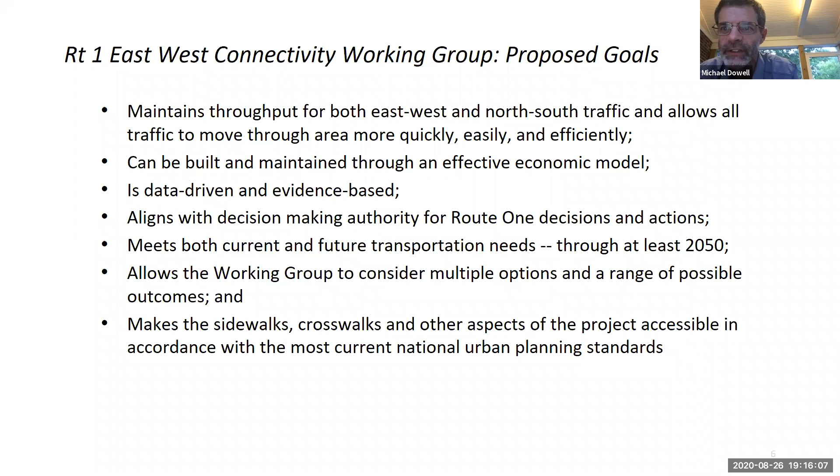Okay, so that's the overview of the proposed goals. Keep those in mind tonight as you listen to the presentations, and I look forward to getting a lot of input back from everyone. Okay, thank you.

Yeah, and this is Dana Bress. One of the things we need to do is find out how the community uses and crosses Route 1. We all have our horror stories about problems we've seen with it.

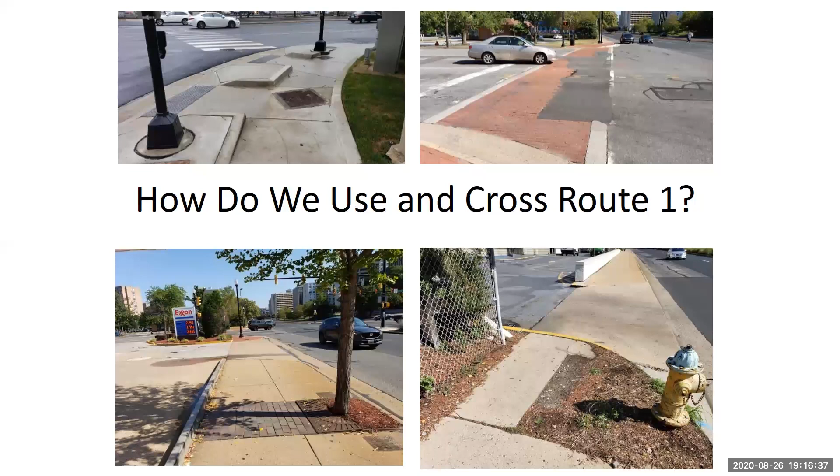So what we've done is crafted a small survey that will holistically look at the full length of Route 1 in Arlington County. We're not starting at 23rd Street, we're starting basically at 4 Mile Run. Because most of us both cross Route 1 as much as we use it as a thoroughfare, we want to help understand your priorities and your issues.

So we have a Google Form survey that's up, and we will email the link to y'all and provide it to the civic associations for their members as well.

Basically what we're trying to find out is where do you live and work, where do you cross Route 1, and where do you avoid? We all have our favorite crossings - I fancy 18th Street - and then we have the ones we avoid like the plague. Both of those are important, because the ones that everybody avoids probably are the ones that the planners need to look at harder.

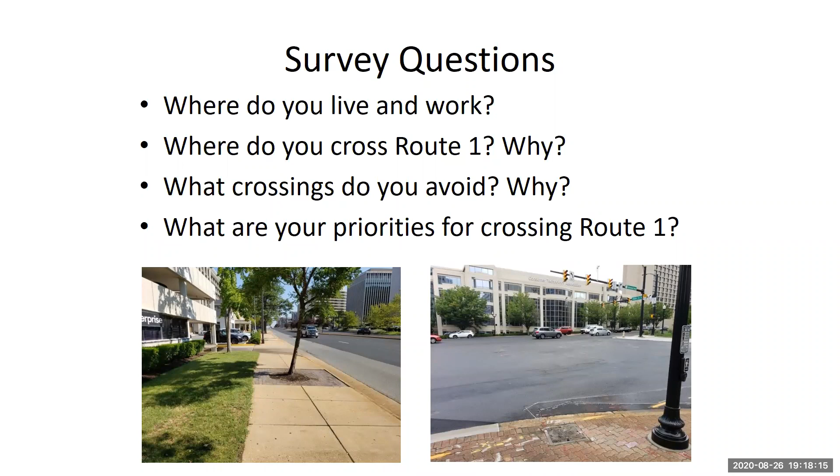And then what are your priorities? Do you cycle across Route 1? Do you walk? Do you drive? This survey is going to be up for a couple of weeks, and we encourage everybody to participate so we can maximize the input from the community members. Thank you.

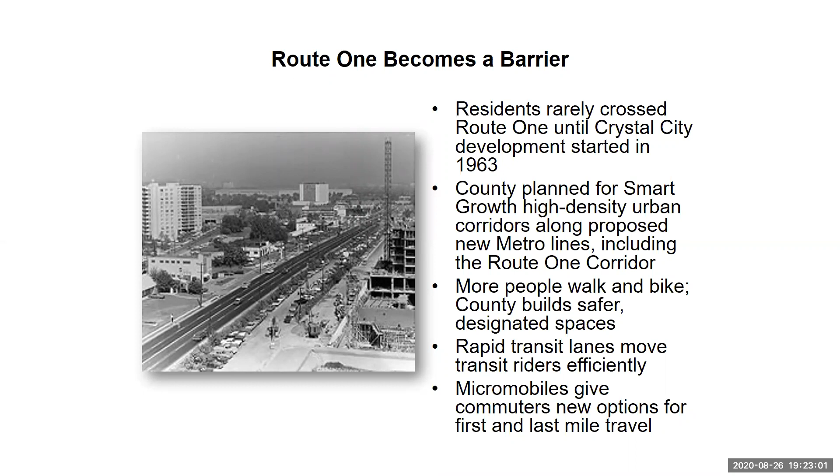Since then, alternative transportation modes have kept increasing. Walking and biking are increasingly popular and better supported by safer designated spaces, including some of the bike lanes you all use. Rapid transit lanes such as Metroway ensure buses can move efficiently so riders can reach their destinations basically as fast as driving. And then a variety of other mini modes of transportation, like the scooters you see everywhere, provide new options for first and last mile travel.

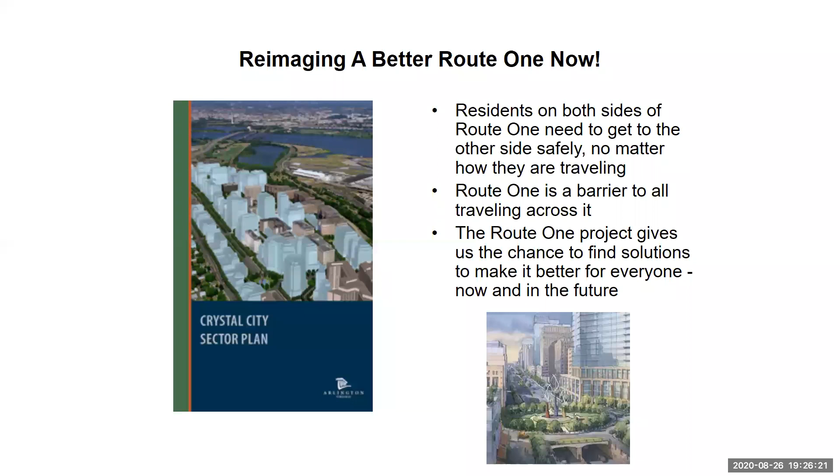So the project that we're working on right now is to redefine Route 1 so that it's not a barrier and isn't often a safety hazard to all people traveling across it, whether walking, biking, or driving. I think this project will give us the chance to make it better for everyone, even now and going into the future. So that's the conclusion of my quick history, and we'll take it away from there.

Thank you, Emily. We'll turn it over now to Darren Buck for the working group ideas.

Hi, everybody, I'm Darren Buck. I'm a 10-year resident of Aurora Highlands and a few years in Arlington Ridge before that, a few years working in Crystal City before that. I'm a professional transportation planner, but my qualifier is I am definitely not here representing my current employer. I'm here as a resident who is really interested in this project and eager to see what comes out of it.

So I wanted to talk a little bit about some ideas, and I'll take my video off, and let you know that unlike last time, I do not have a pizza on the way, so I should be able to talk uninterrupted. We want to talk about some ideas of what we could do with Route 1. I'll qualify them up front and at the end to say these are really just ideas. In discussions, we tried to weed out things we knew weren't going to happen, but these really are kind of unconstrained by a lot of reality.

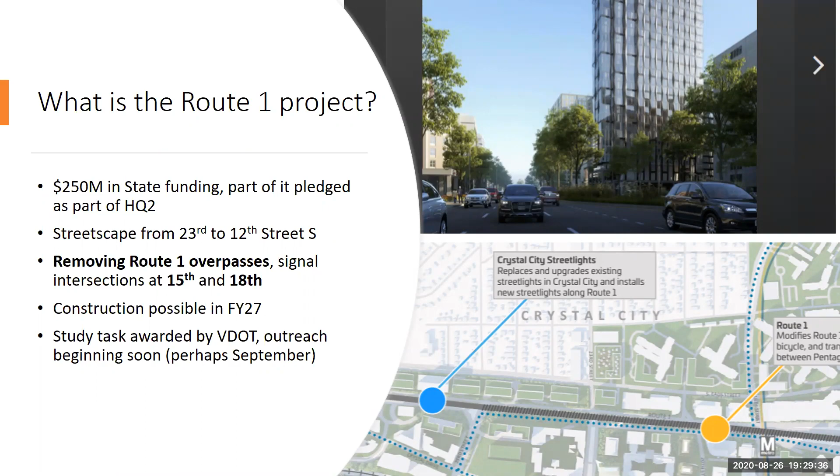Next slide, please. So last time we reviewed some of the potential impacts as we saw them, based on what little we know about the project, of lowering Route 1 to grade at 15th and 18th. I'm not going to go over everything here, but I've bolded what we thought were the major positives and negatives: delay, safety, the aesthetics and personal comfort aspect, transit impacts, and development potential.

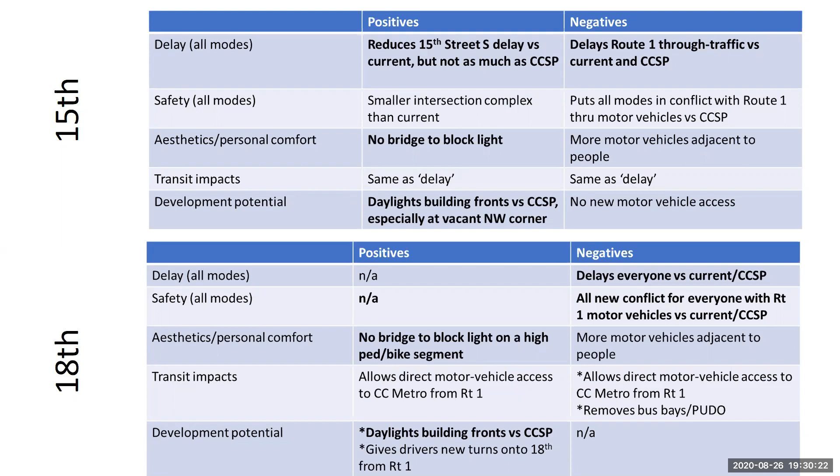Next slide. So last meeting, Mr. Matusek, the county planner for the area, told us that the Route 1 project is going to be wider than just considering the at-grade option, and that's great. So we took that license and we ran with it, and started thinking about what we could do other than just simply dropping to grade.

So we wanted to introduce some new ideas. Again, some of them are a little out there, but let's talk about them. These could form the basis for different plans, either at particular intersections or segments, or for the whole Route 1 corridor. So think of these as concepts that maybe work in one place, don't work in another, or maybe something more suitable for a whole corridor treatment—who knows.

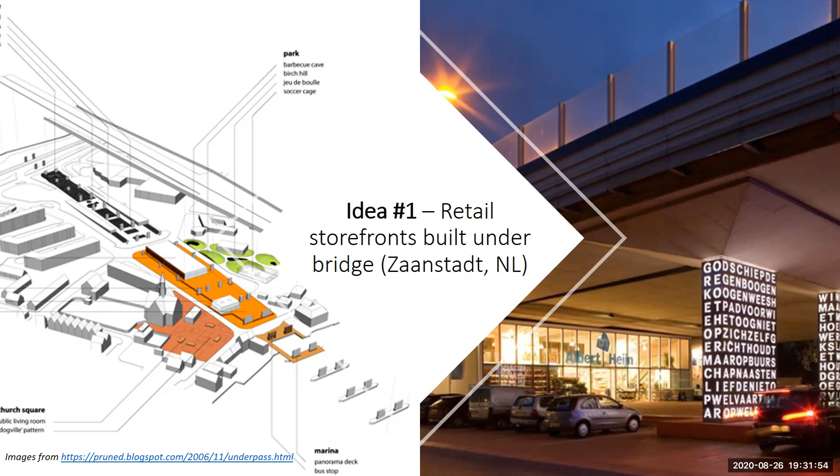Next slide, please. So our second broad idea is creating more open space under an elevated structure. Many places have used the open space under bridge structures that are held up by piers—big vertical columns—instead of just abutments, the big hills of dirt that divide east and west here in our area.

So this space under the Granville Bridge in Vancouver, British Columbia is a great example. It's got buildings fronting onto a street that runs under the structure. It's worth highlighting two things that Granville Bridge has that we don't: a lot of vertical clearance or headroom, and that really nice vintage steel girder structure. It is an attractive bridge.

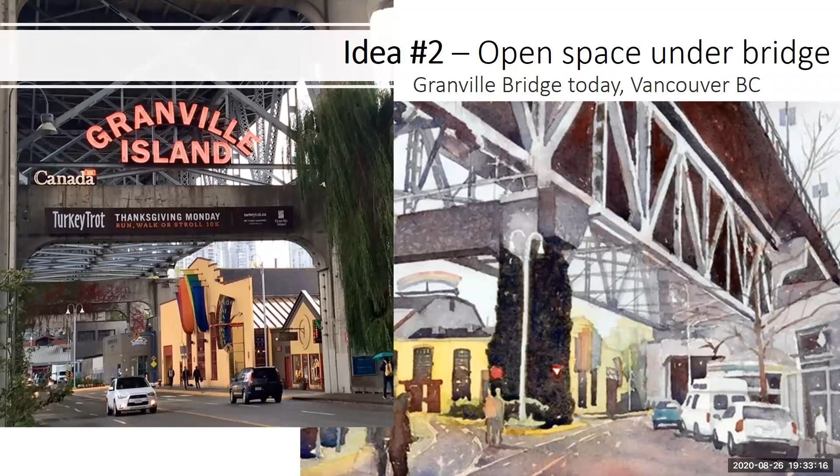Here's a future concept that I believe is under development for another portion of Granville, where development actually fronts onto open space for the community. And we all love our shade and open space—it's shaded from day one.

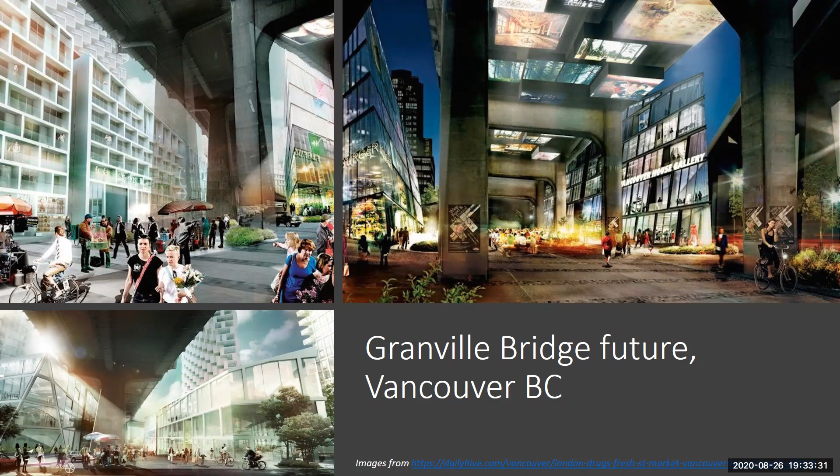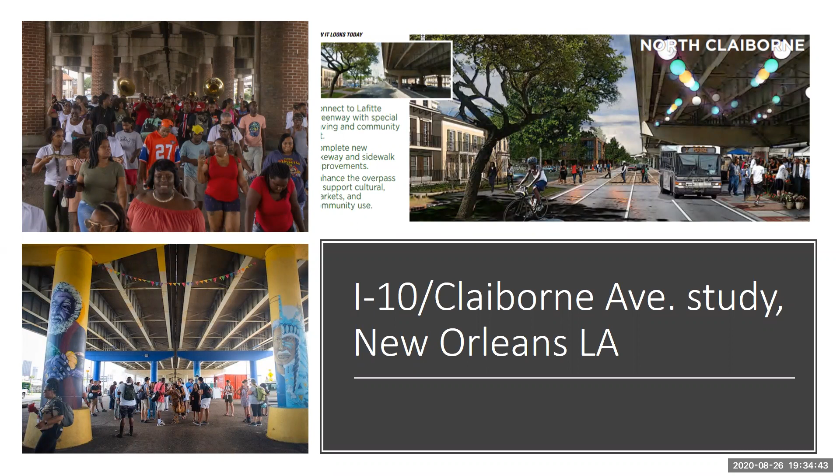Finally, another example of activating open space: this is under a highway, a section of Interstate 10 in New Orleans, where they formally studied whether or not they should take down that viaduct. I believe they ultimately decided to maintain it and make better use of the space underneath. Unlike some of the previous examples, this bridge structure itself isn't particularly attractive, but it's still more open than our underpasses, and it's used.

So third, this is kind of one of my pet ones: can we consider running Route 1 under some cross streets instead of over or through? There's a wildlife crossing structure shown on the upper left, or for those who know India Point Park in Providence, Rhode Island, on the right. This could enhance east-west connectivity for all modes, with the addition of sunlight from removing an overhead structure, but also giving you the chance to introduce biophilia that these cross streets don't have now.

This would be a particularly compelling option at 18th Street South, as I've produced a very crude sketch in the lower left. There are no intersecting car movements now to accommodate with ramps. However, a big potential limitation here, and for some of the options to follow, is the unknown factor of the Metro Tunnel under 18th Street and exactly how deep it runs. I've heard anywhere from 15 to 75 feet, so that's a big question for our friends at VDOT.

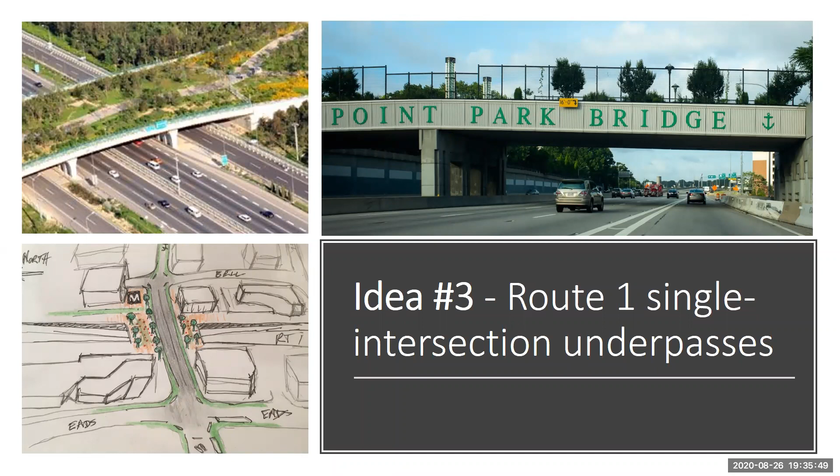So we've got what we're calling option 4A, which would take a substantial length of Route 1 and put it underground with a cap over it, with some combination of open space, development, and a small surface street for local access running over this sunken highway. The previously noted challenge of the 18th Street Metro Tunnel applies here as well.

Boston's Big Dig, shown here, shows something similar, though the surface street is much larger than what our area would require. The Big Dig overall was a far, far larger project than our stretch would be.

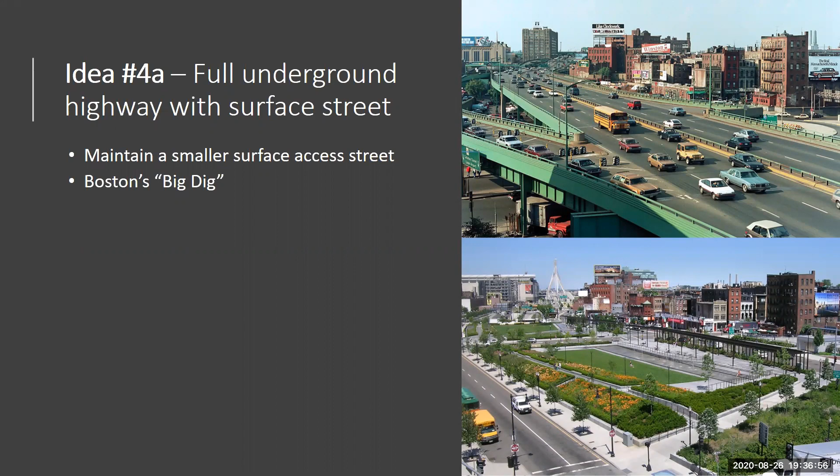Here's another, more scaled option, probably more similar to ours. This is from Denver: there's a concept to deck over a part of I-70 with parkland and surface access roads. What you see on the left is the current situation—an elevated freeway that runs right by an elementary school. So this project is tearing down this highway, putting a wider version of it with toll lanes in a trench, then decking over this 4-block section with a park that's right adjacent to the elementary school.

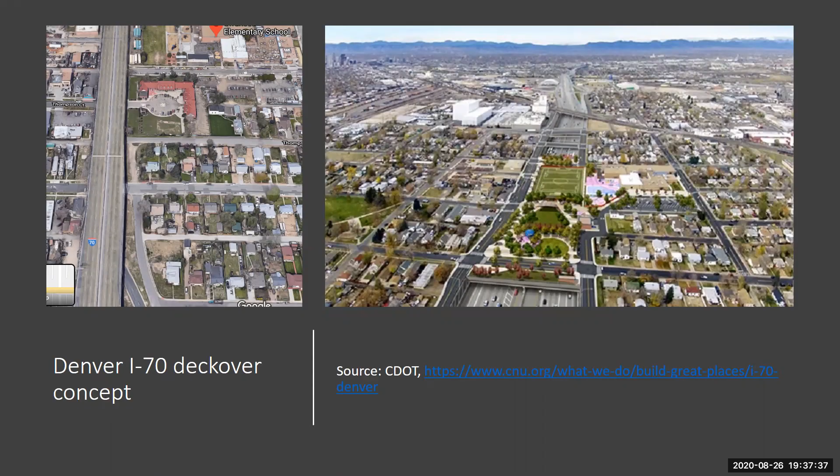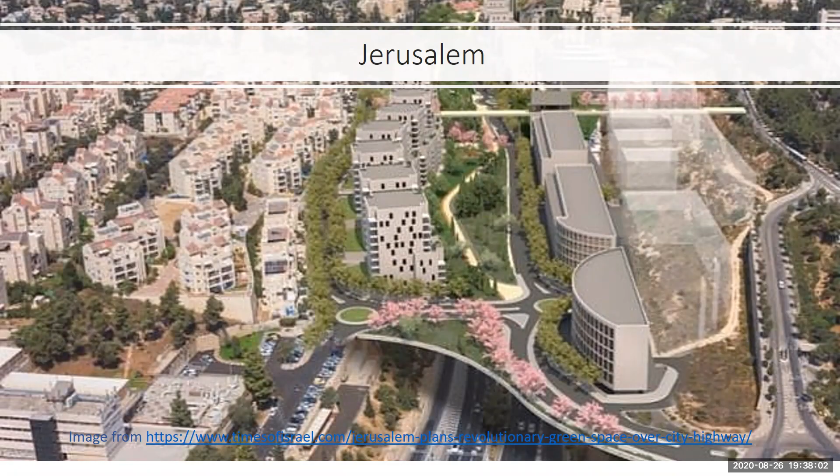Our next idea is a twist on the previous one, going a little further. Can we imagine the entire Route 1 below grade, with some combination of open space and development over top, but with no surface street, relying on Eads, Clark/Bell, and the cross streets for intra-community motor vehicle access? Again, the 18th Street Metro Tunnel is the challenge, with the added twist of how exactly our community would access Route 1 in this scenario.

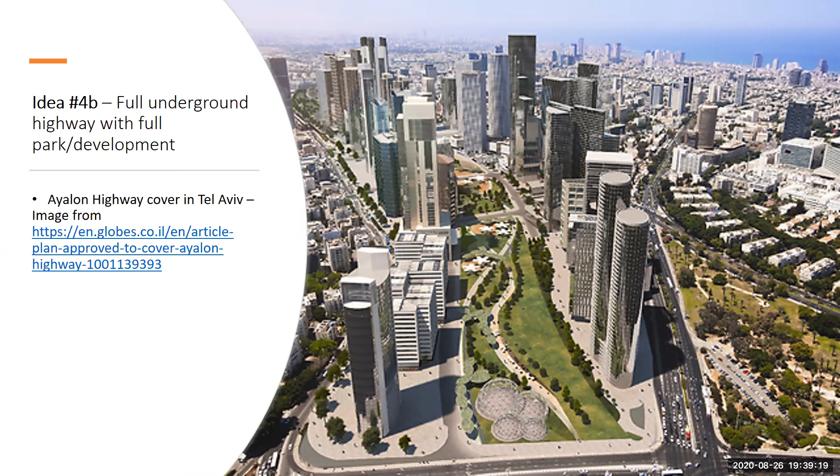This example in Tel Aviv is actually under construction. It's a very substantial highway and transit line running beneath. You can see it's a pretty wide stretch, a pretty impressive project.

Another one from overseas: this is a section of the Autobahn, a 2-mile stretch in Hamburg, Germany. They are putting that highway in a trench and decking over with a combination of parklands and homes.

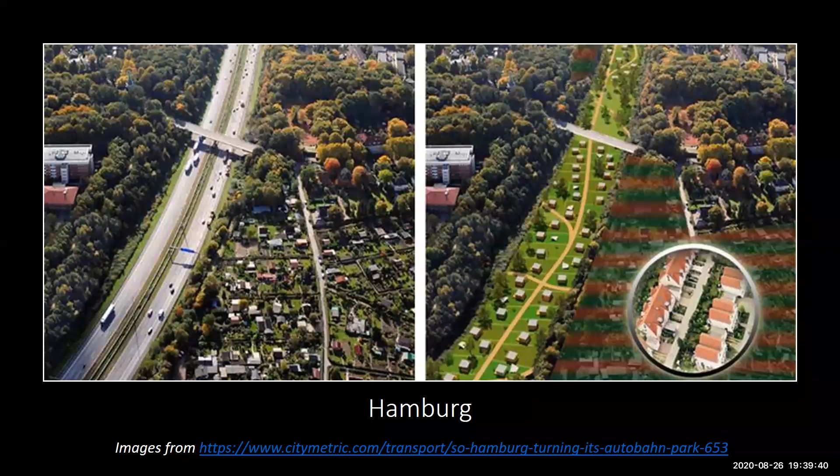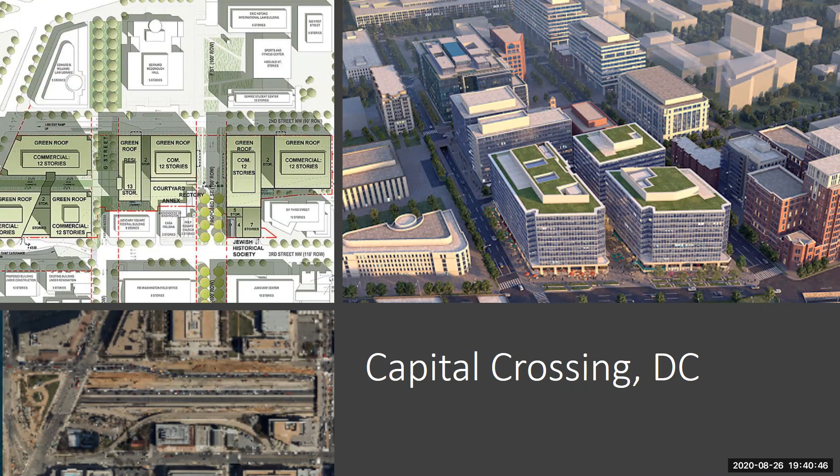And finally, just over the river in the District, a developer built 3 entire new city blocks over the existing Center Leg Freeway. For those of you before the 695 interchange project, who went up the Center Leg Freeway and hung a right on New York Avenue to try and get to 295 - that's what you go under now. It provided basically 3 entire new city blocks of city, reconnecting F and G Street Northwest in the process.

We would need, getting back to Mike's presentation about our goals, a lot of detailed traffic analysis on this idea - to look at travel times and the potential for side street diversions - especially with many of us re-examining our relationship with being in a physical office. Is maintaining a big 7-lane highway, whether at grade or still going over our heads just for peak hour period traffic, still justified, and does it meet the needs of our community?

Nothing worth doing is easy, of course. There are issues we know about, and issues that will percolate up as VDOT goes through this process. First is finances - the state hasn't pledged probably enough money to carry out even the at-grade project, and VDOT, due to the pandemic and radical recent decreases in driving, is in a budget crunch.

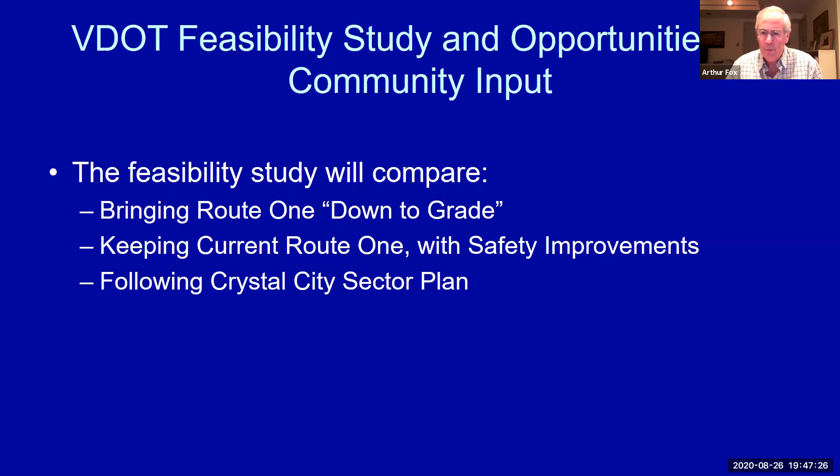Adjacent landowners, by the way, are, as you might imagine, strong proponents of this particular plan, which would enable additional development of land along the edges of the highway with pedestrian-friendly sidewalks lined by trees and retail establishments.

In any event, VDOT intends to launch this study this coming month, September, and to engage the public with periodic briefings and a means for providing input. Exactly how that will be accomplished has yet to be worked out, but you can be assured that we will let you know as soon as we know anything, and that our Livability Working Group will be on hand and engaged in this process over the coming year.

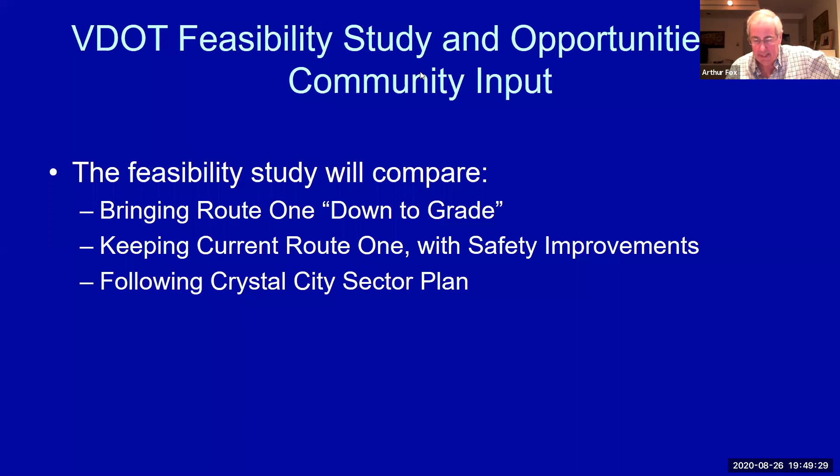The study is expected to take place. Indeed, as you've already seen this evening, our Route 1 Working Group has already begun preparing to interact with VDOT over the coming year by assembling a list of goals and a range of conceptual ideas for how the highway might be reconfigured in a manner consistent with the Crystal City Sector Plan. Next slide, please.

So what you're seeing, and I hope you'll glance over this and the coming two slides in a moment, were lifted directly from the sector plan at the pages indicated at the bottom of each of them. So this one, if you went to or downloaded the Crystal City Sector Plan, which is available on the county's website through the internet, you'll see that this particular quote comes from page 61 of that document.

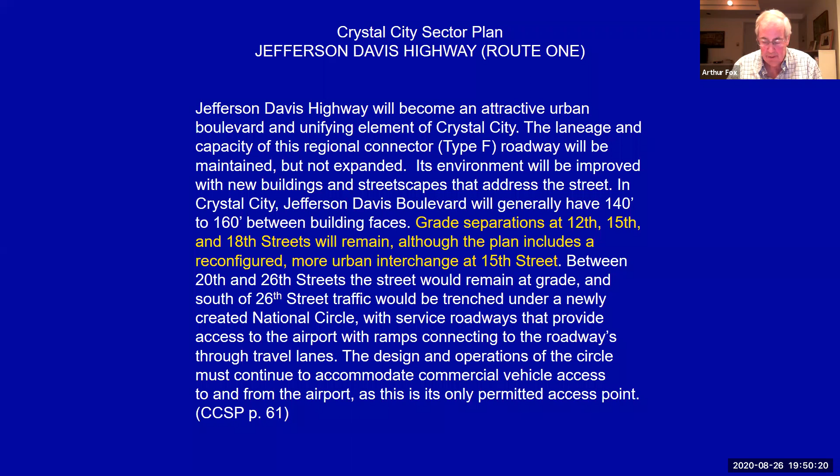In fact, they represent almost the entirety of the sector plan's guidance for the improvement of Route 1. Next slide, please. The one takeaway you'll notice is that they do not call for the roadway to be dropped to grade.